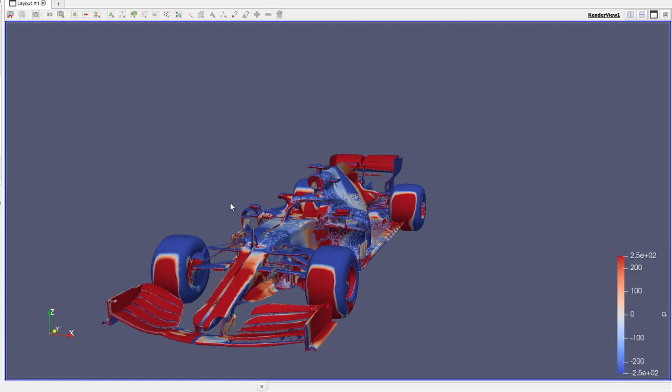Hello and welcome to part 3 of the series where we're going through comparing the Williams FW42 to the Mercedes W10. The first part we looked at the front of the car, the second part we looked at the middle of the car, now in this final part we're going to look at the rear wing, the T-wing and the diffuser and see how each worked, comparing the two to each other.

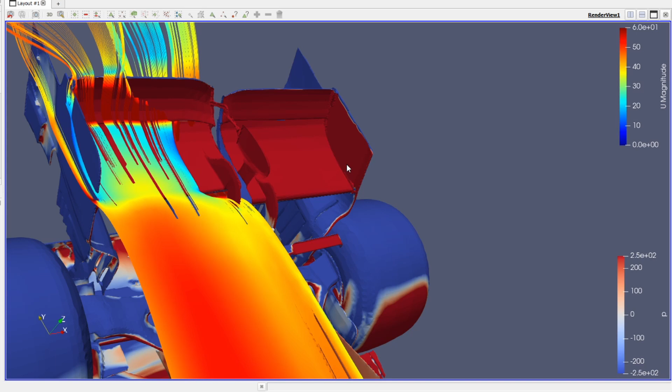So let's start with the Mercedes at the rear wing. What I've done is created a line, you can see it there, and it's the same on each car, so we can see where the air on each line from each car is coming from and where it's going and how each is working. Remember, this wing's height is stipulated by the regulations, so there can't be much height difference between the wings. It's more about the design of how much air goes to that wing from the front of the car to the back.

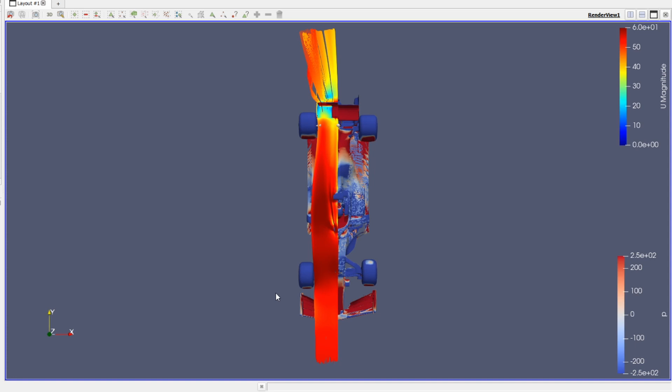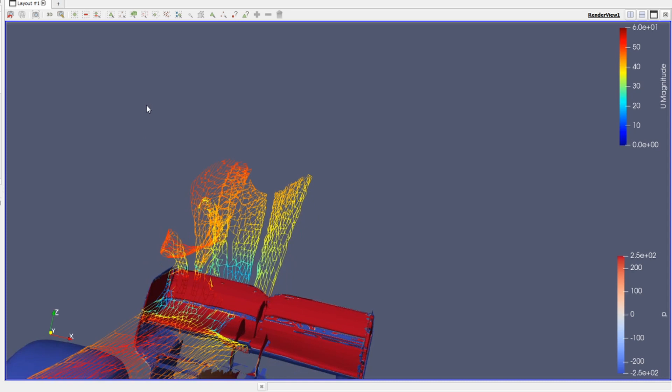So there you can see all of the air from nearly there till there on the Mercedes goes to the back wing. Then there, from there, a lot of the air from the front is going over to the back. So there you can see - not much to say about where the airflow is there.

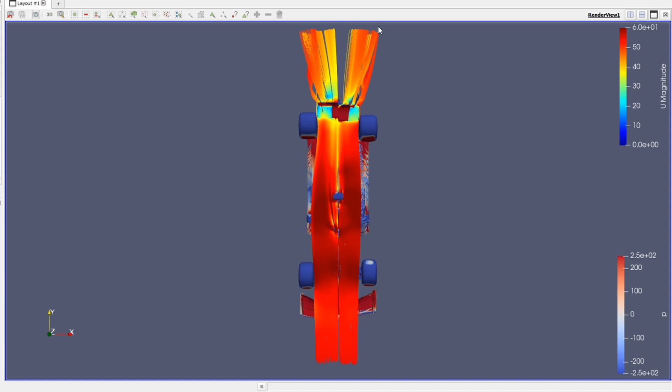It's more if you look at the Williams now from the top view, you can see the amount of air that they're pushing into the rear wing is different, and their design is causing more air to bleed off. So it seemed that maybe the Williams design philosophy was to kind of push the air off to the side. I'm not sure, but I think whatever the philosophy was, it wasn't really working that well for the team last year, so hopefully this year they fix some of those problems they had.

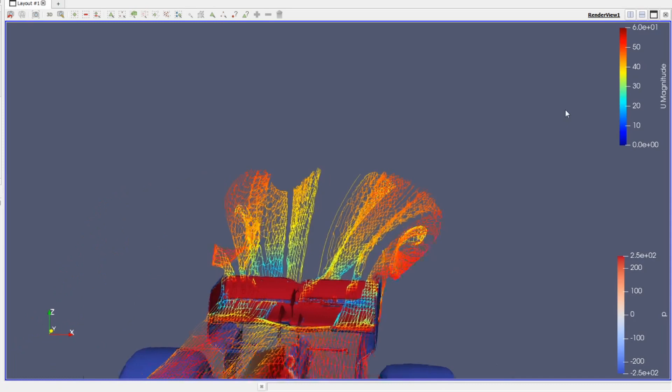So there you can see how much extra air the Mercedes were able to get over that rear wing.

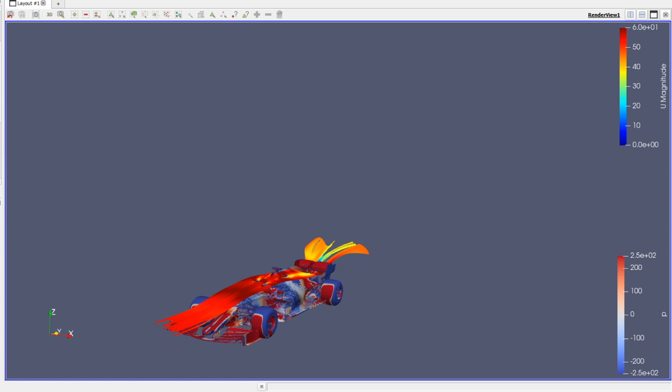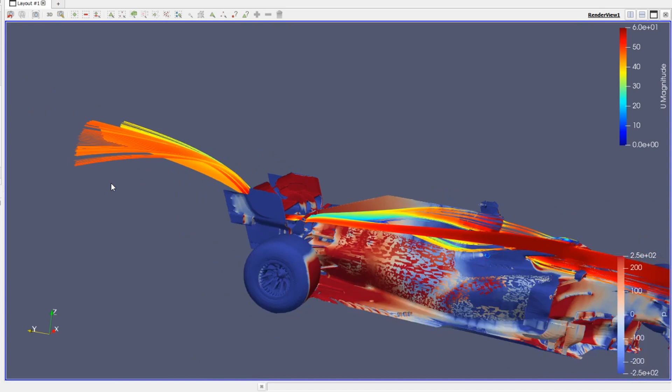If we go over to the T-wing now, starting again with the Mercedes, you can see them taking all this air, pushing it through the T-wing, getting the speed there, changing the direction of the air to increase the downforce of the rear wing. So instead of this air coming off down the side here, they're kind of flattening it out and increasing the speed as it goes underneath the wing there.

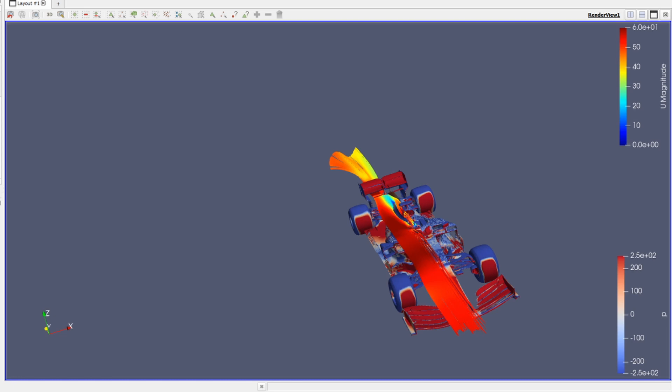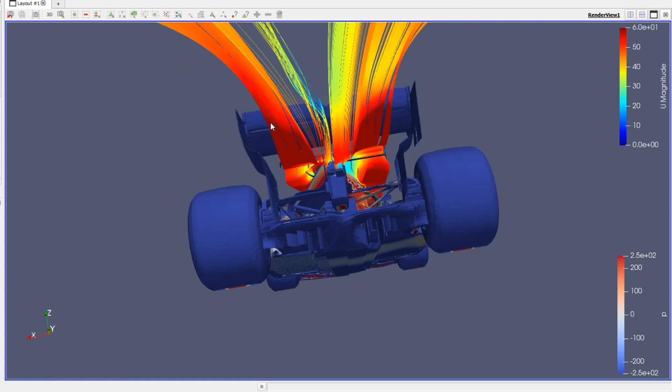If you then look at the Williams, you can see they had less air going to the T-wing, less air then going to the rear wing, and also the whole philosophy was to push the air out. You can see the speed here, the difference between the two.

So the shorter car is the Williams. On the side, you'll see the speed area here - it's very different between the two cars and the amount of air that the T-wing is pushing underneath there. Let's just go to the rear wing as well, so then there you can see the different philosophy of the two.

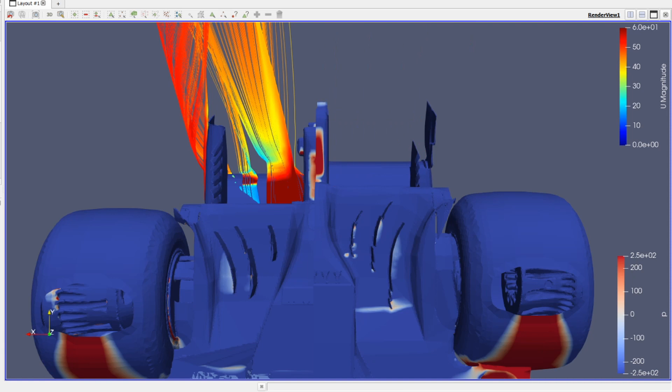Before we go into the diffuser area, you can see the clear difference between the two - this one being the Williams with more of a profiled Venturi that they have here, with the Mercedes being a lot narrower for longer and then opening up to the side.

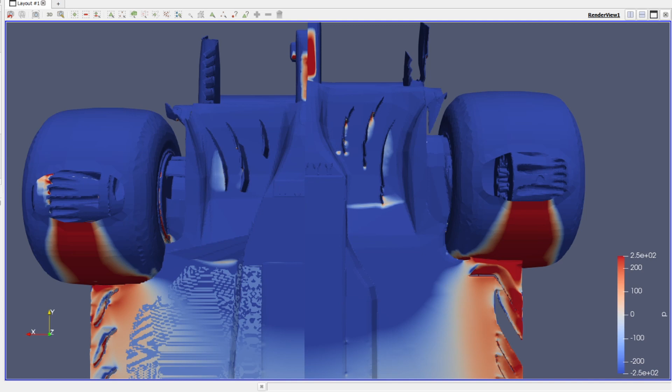So similar thing, I created a line just showing where the air is coming from. With the Mercedes, you can see they're getting the air to stay underneath the floor, getting the air to go to the back. They're getting all this air from here, underneath, from the barge boards area.

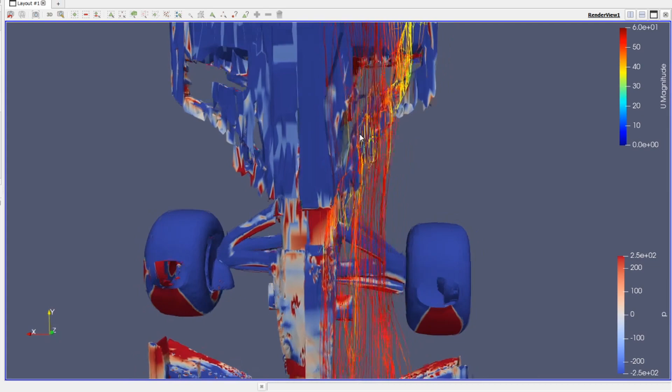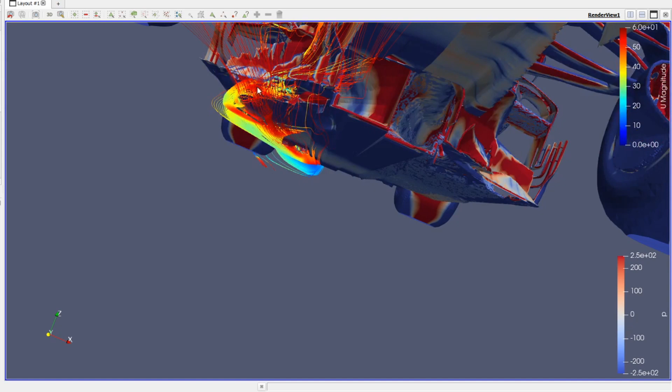You can see how they turned all this air down with these vanes here, and these vanes here creating sealing air, and then these vanes here pulling air underneath the car. So then this air swirled, sealed it, went to the back, and then the low pressure there as it expands - the air speeds up, and that speeding up of the air creates the low pressure.

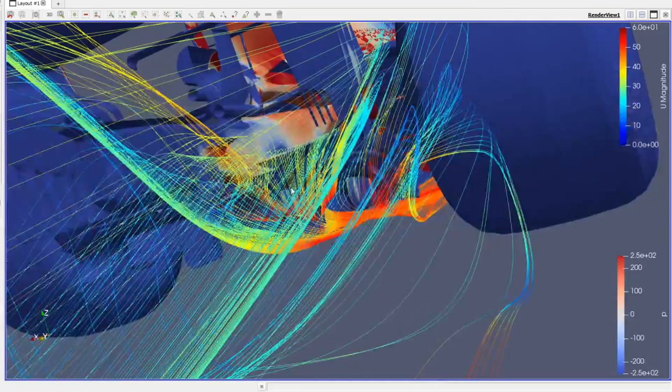And then as it opens, the vortex is there. So then they're also getting air here through the top, through these vanes here, sealing it nicely, getting more air down to seal.

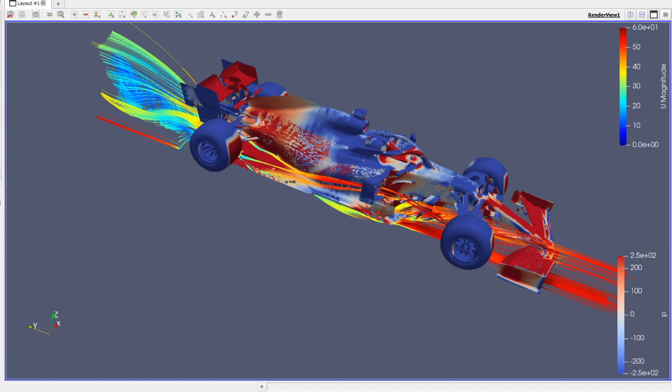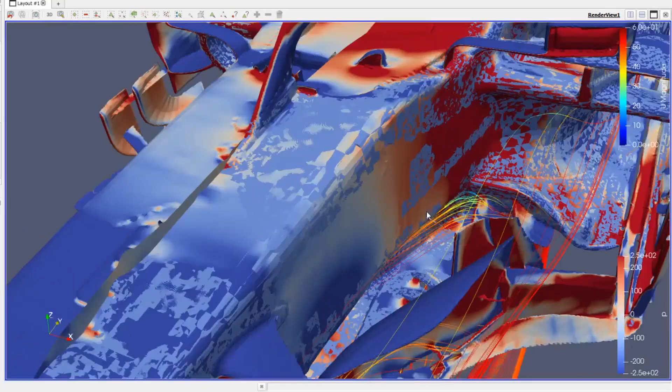Now we look at the Williams. Similarly, we get air from the front here, getting worked by the barge boards area. So air here, trying to push all of it down here with these wings here, under the car. It gets pushed off the side.

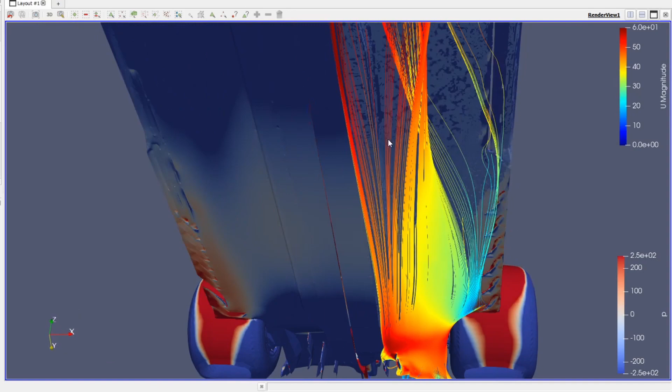These wings here, all these little wings here try to get air underneath. But there you can see the air is just bleeding out a bit, not as sealed as the Mercedes.

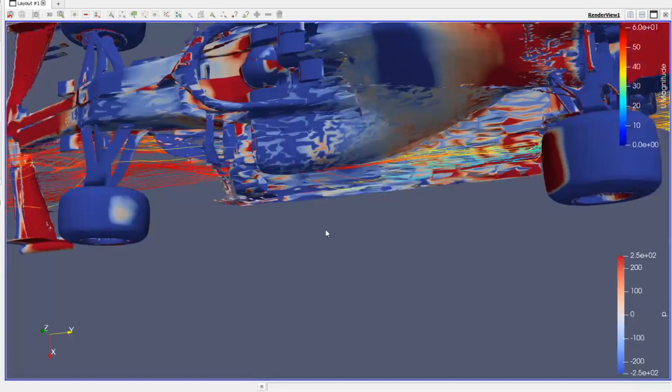And there's a bit of air coming in to try and seal through the side here, coming here underneath around the tire, and out the back through the diffuser.

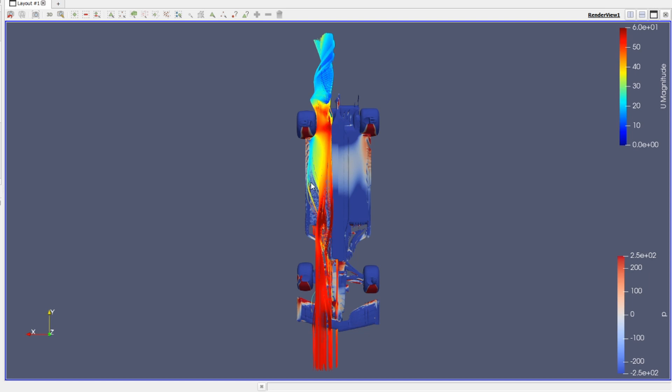So if we just look comparing the two underneath - here's the Williams, you can see. And the Mercedes there. So the Mercedes clearly got a lot more air underneath the car, which was able to work the floor a lot more, have more downforce.

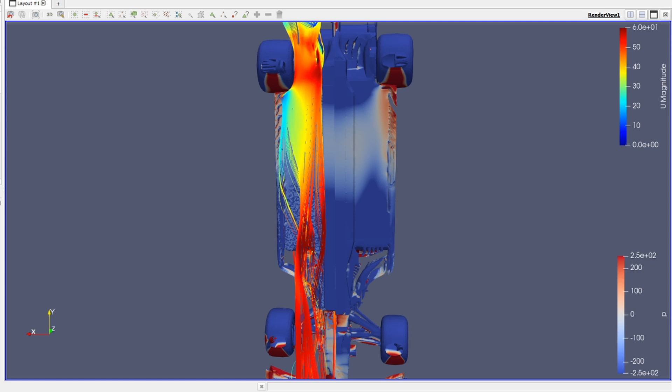So there you can see the amount of blue area, the low pressure at the back. It's a lot more - they had a longer car and more low pressure underneath the car, more surface area. While the Williams, a smaller car, smaller area - the front seems to be working well, but again it's a smaller area.

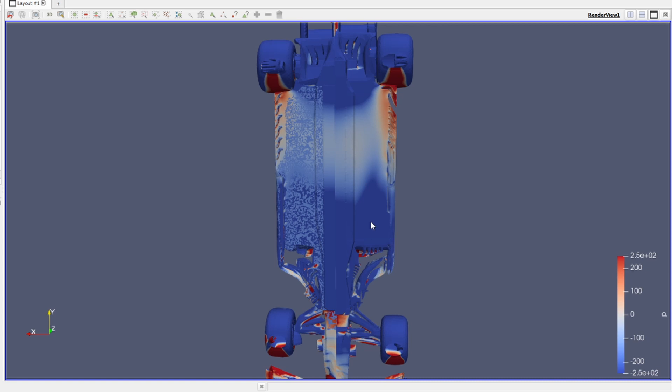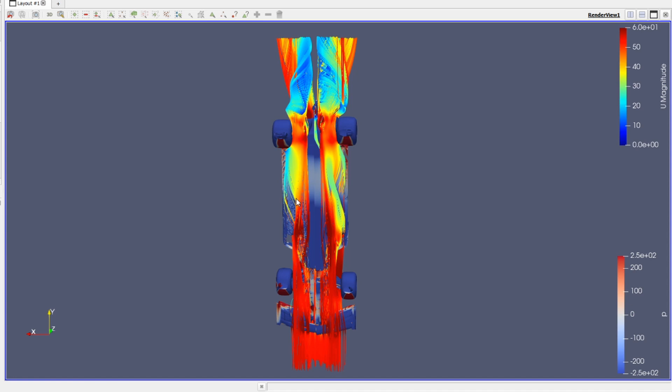So let me just put all three of these on. Now you can see the difference between the two. From the top, more air was going through the back from the Mercedes side and less from the Williams. So there you can see that. Let me just put on all my stream traces and then we can clearly see the different philosophy between the two cars.

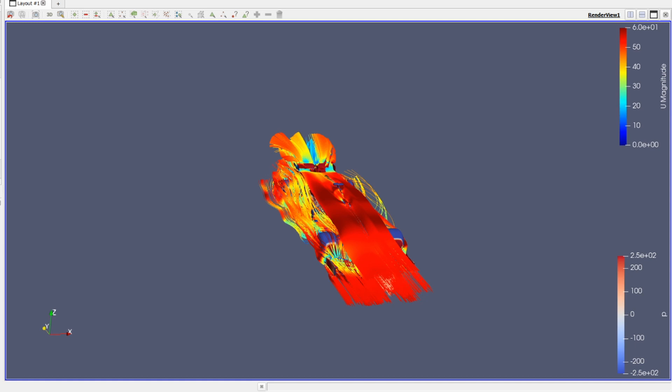We're just fixing the color mapping.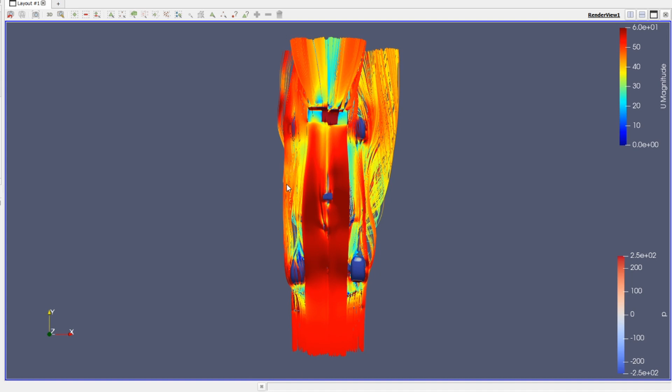So from the top, you can see the air from the Mercedes is all nicely together, while the Williams has this large vortex and a lot of air bleeding off to the side. From underneath, you can see a larger speed area here underneath, higher speed through to the back. The Mercedes was together - the Williams car had this large vortex off the side.

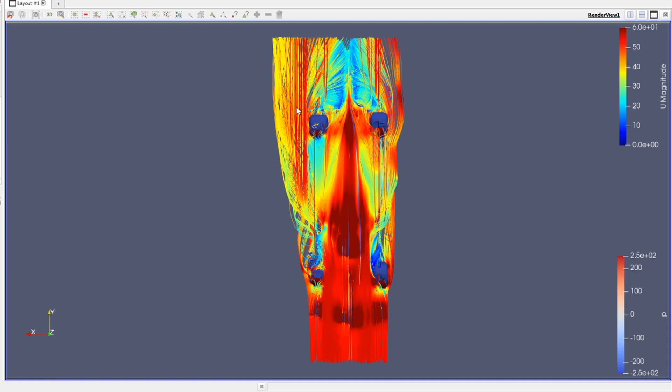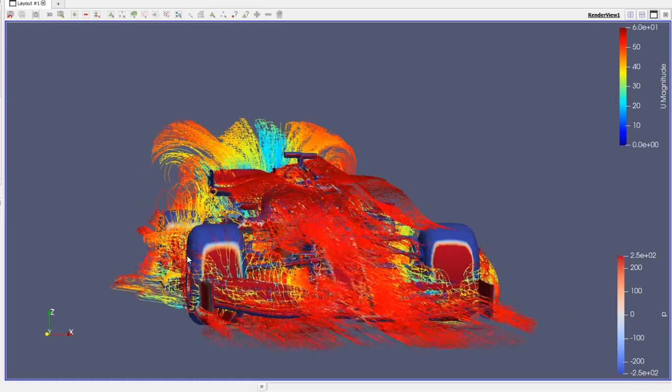From the front there, Williams down the side here. The Mercedes is nice and neat. There's the Williams, and there's the Mercedes.

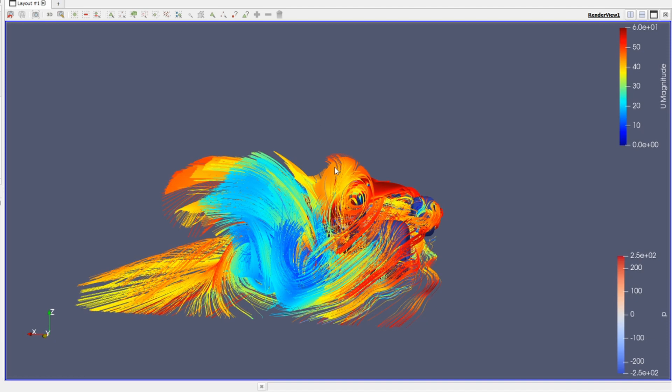From the back, the Williams here with this large wake, the vortex. There you can see the difference between the diffusers and a difference in the vortex that they produced at the back. The sealing air - the amount of air that gets wasted here by the Williams compared to all the air that's kind of attached and used by the Mercedes car.

From the side there, the Williams, and then the Mercedes there.

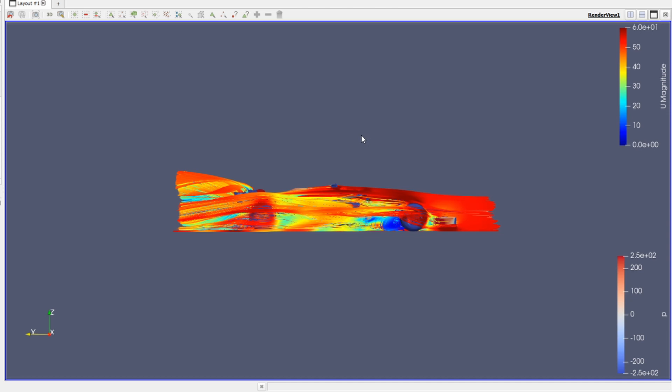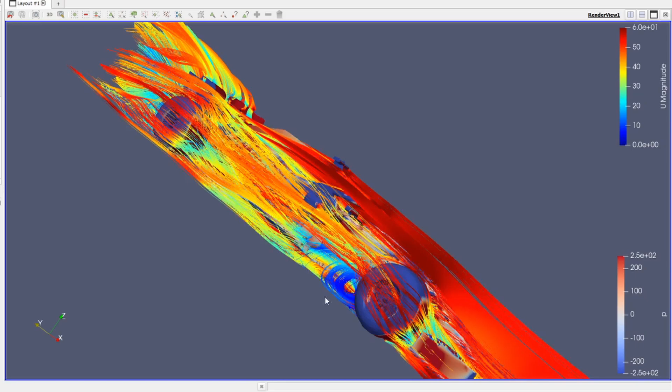There's some caveats - there was an error with the Williams one. I didn't actually rotate the wheel on this one. That's why you see the Mercedes has this vortex here, low pressure behind the tire, and not so much with the Williams. I'll rerun this simulation and see if there's any major difference between the two. If there is, I'll re-update the videos to show the difference.